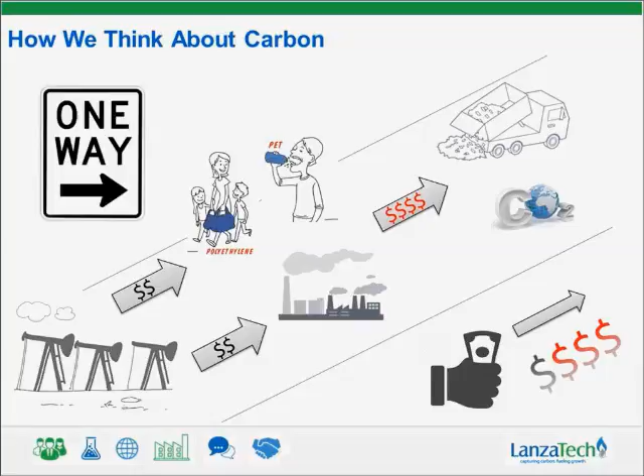The world desperately needs a different way to think about carbon. Today, if you look at the next slide, you'll see it's always a one-way approach. We start with a fossil resource and we either make our chemicals or make our fuels or we power our plants. And from that either comes waste that we dump into a landfill or an emission that someday we hope to be needing to sequester.

That path puts us in, we make money when we make the products, but then we use money when we have to get rid of them or dispose of them. And so the world that we want to head to is one where these are not liabilities that need money to be disposed of, but rather they're opportunities.

They become opportunity feedstocks, and that is really what we call a carbon smart world. A world where not all of the carbon that goes into our products is new. It doesn't all have to be new carbon coming from a fossil resource, but rather a world where these waste emissions can be recycled in some way, giving carbon a second life and allowing us to make money by creating products, and also allowing us to do what we really need to do, which is reduce our new fossil carbon sources so that we can keep carbon in the ground, so that we can meet our COP21 commitments of staying within the 2 degree carbon budget.

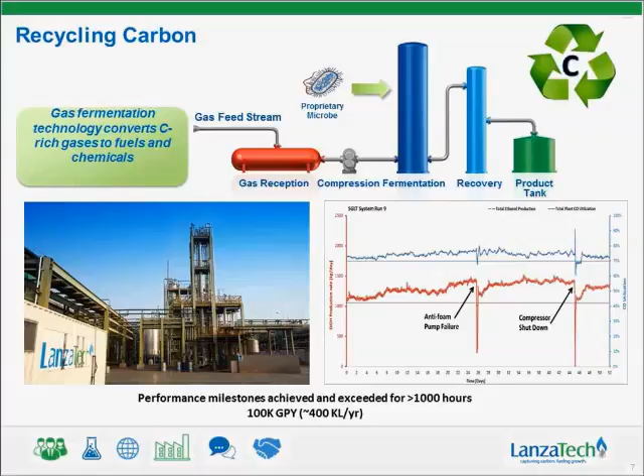If you look at the next slide, you ask yourself, what kind of organism can actually eat a waste gas stream that is full of contaminants? The answer is, once upon a time, our planet was full of the same nasty gases.

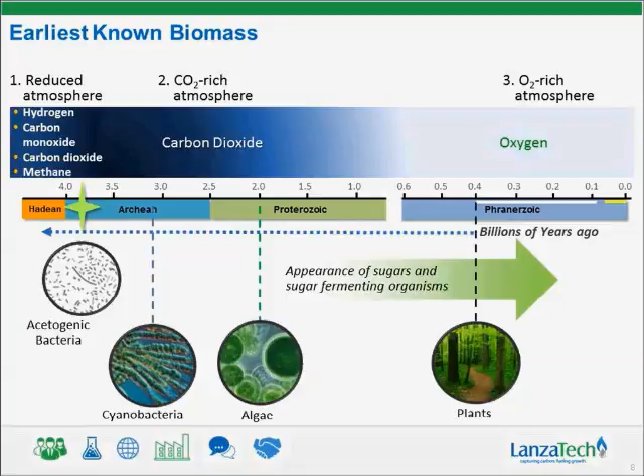There were organisms that lived at that time, in particular bacteria, that were able to eat this waste carbon monoxide, carbon dioxide, methane, and hydrogen that was in the atmosphere and metabolize it into products. So what we're doing is not really anything different than the biotechnology that plants do today, but instead of plants using our current atmosphere, we're using an organism that was really the plant billions of years ago, when our atmosphere could only sustain these types of organisms. All we've really done is gone back to that time and picked an organism robust enough to do this chemistry.

When I talk about this, sometimes it feels a little bit like science fiction, but it's not. We've got more than 40,000 combined hours at multiple sites, many steel mills throughout the world, and we're now in the process of commercializing our technology.

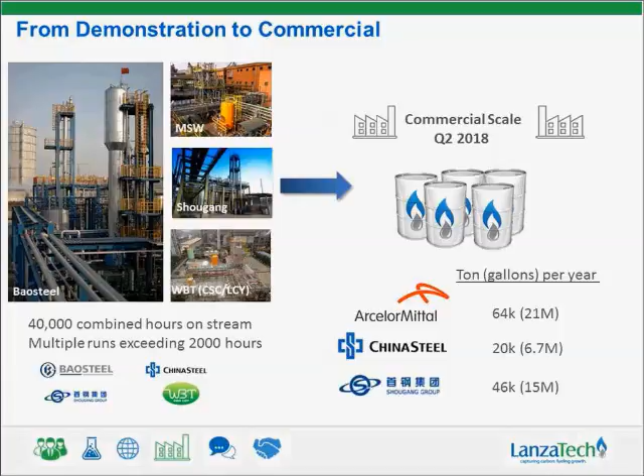We are building from this 100,000 gallon scale that I mentioned. We're going to commercial facilities at 3 steel mills: one in Europe at ArcelorMittal, the largest steel company in the world; one at China Steel in Taiwan; and one at Shougang Steel in Hebei province. The picture I had originally shown you was a steel mill that Shougang owned, which is where the first commercial facility will go. That will be a 15 million gallon a year facility, and we will also have one at China Steel in Taiwan and one in Ghent in Europe, which will be 20 million gallons. I hope by 2018 we'll have multiple commercial facilities operating.

At the end of the day, we're all doing this because we want the environmental, economic, and social benefits required for us to move into that new world of a circular economy. What you're looking at on the left is life cycle data done by E4Tech showing a reduction of 70%, almost 80%, of the carbon footprint when you start with fossil gasoline versus taking waste carbon from a steel mill and recycling it to make ethanol.

The carbon footprint very much depends on where you are in the world, so we've done multiple life cycle analyses: Michigan Tech in the U.S., the Roundtable on Sustainable Biomaterials in China, Tsinghua University in China, and Ecofys in Europe, showing that we get 50 to 70% carbon reduction relative to petroleum. This system is all based on water recycling, and of course no land is used. There are no biodiversity issues. There is no food versus fuel or other such issues.

But what we are doing is providing a revenue stream from a waste material, which we believe is really going to be the driver for utilization of waste materials. Because once you've got a business proposition, it actually becomes a pull for technology that can convert waste products.

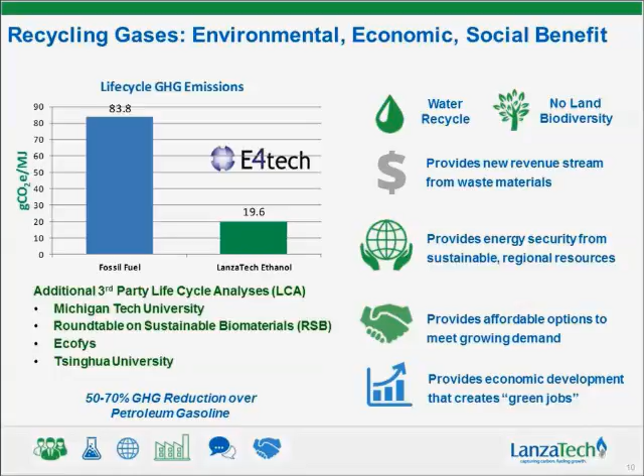One of the questions I always ask is: is there enough waste gas streams for us to actually have a meaningful impact on the creation of a new fuel economy? And the answer is yes. If you look just at steel mill waste alone, globally, we could produce more than 30 billion gallons per year of ethanol. If you look at refineries, there are some gases we can use there, and we believe we could make over 5 billion gallons a year.

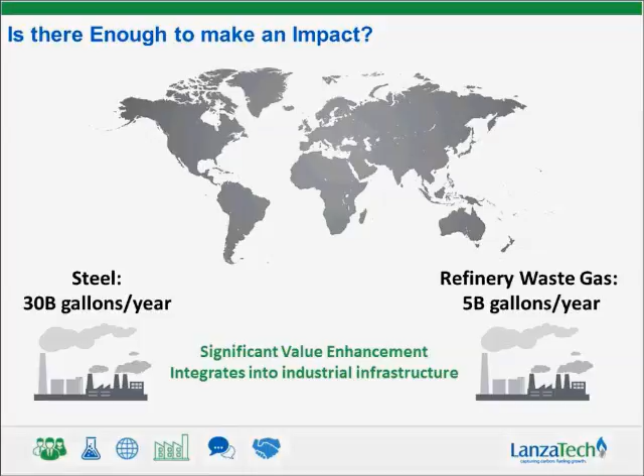We note that we can also impact PVC plants, ferroalloy plants, et cetera. This just gives you a sense, an order of magnitude, of what is possible in terms of producing fuels and chemicals from waste.

If you look on the next slide, one of the things we're trying to do as a company is actually create a company, not just create one production facility. Using this gas fermentation platform, using this waste gas carbon recycling platform, we believe there's a variety of gas streams. I've already mentioned some manufacturing types, like steel and PVC and refining, and I'll mention a couple of others. But we also take the view that ethanol is just our first product, and that long term we want to be able to take these waste gases and also produce chemicals.

In the next slide, one of the things I want to articulate is that beyond manufacturing waste gases, we can also gasify municipal solid waste to make a gas that our organisms can eat and make into products.

The view we have is, as you know, today in the U.S., municipal solid waste tonnage is 254 million tons per year, of which we compost or recycle about 30 to 40% of that waste. But the rest is actually in landfills and not usable.

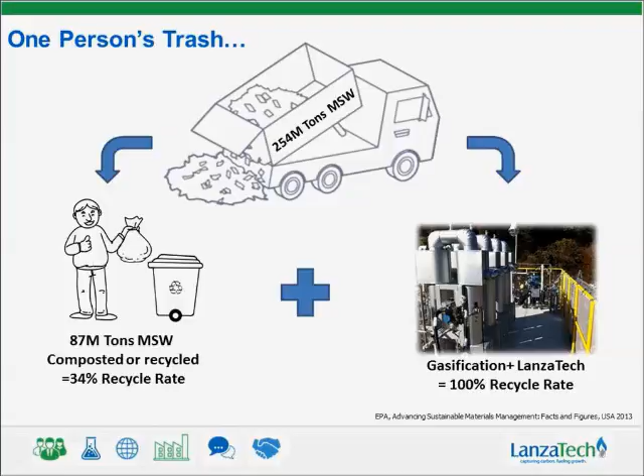So there, what we're doing is combining with gasification partners, which can take that waste solid and turn it into a gas that we can utilize. The goal being that we get to a point where we have 100% of the municipal solid waste being recycled into products.

If you look on the next slide, again back to building a platform, let me now not just focus on the gas inputs, but on the products. Today, one of the key raw materials in the chemical industry is ethylene. And ethylene today can either be made from fossil sources or from carbohydrates, whether it be sugar or corn, used as ethanol, which can then be used to make ethylene. We can do exactly the same thing from waste gases.

We can take the alcohol and dehydrate it to make ethylene, or oligomerize it to make butenes, or aromatize it using known technologies to make benzene, toluene, and xylene. These are key raw materials because that's how plastic bags, toys, clothing, packaging, and carpeting are made - this is the basic building block for most of today's petrochemical products.

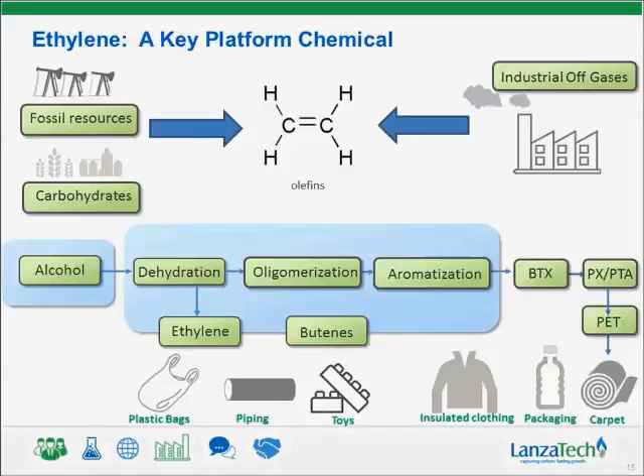And we can make all of this as well from industrial gases. If you look on the next slide, just to give you a sense of the difference between making ethanol for fuel versus making ethanol for chemicals - the difference is that in a case where you are making a chemical like, say, a plastic wrapping...

...now all of a sudden your carbon emissions, your greenhouse gas emissions, become negative. The reason for that is when you take a waste gas and make it into a fuel, eventually that fuel, ethanol, is combusted, so it does eventually go back up into the atmosphere.

If you instead make something like plastic wrapping or a plastic container of some sort, now you're essentially locking that carbon - call it a sequestration - into a chemical product, and you've fixed it for as long as the life of that product exists.

For plastic bottles, if we assume we're starting with ethylene, it's not negative, because not all of that plastic bottle would come from our technology and recycling carbon. But you can see you're still getting a reduction relative to starting with a fossil resource.

So we're really excited about the concept of making chemicals, not just fuels, from recycling of carbon, because that is now a non-geological sequestration of the carbon. And really what we need to do is take more and more carbon out of the air.

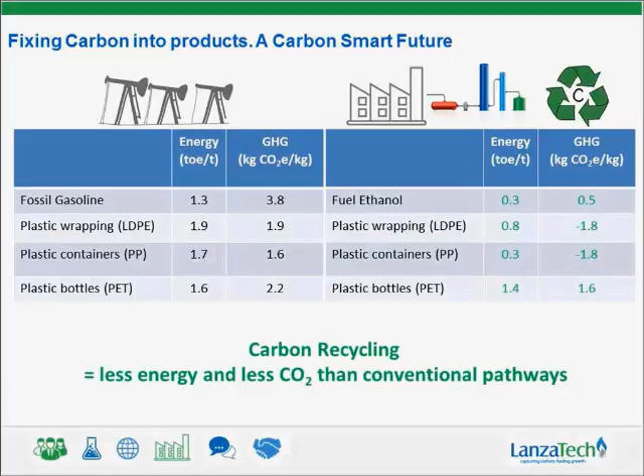If you go on to the next slide, the other thing we're also doing is converting ethanol. As you know, ethanol cannot be put into an airplane - you need a drop-in replacement jet fuel to put into an airplane.

So what we can do is take the ethanol and oligomerize it, make it into larger diesel or jet fuel molecules. And we are working with HSBC, Virgin Atlantic, and Boeing to do that, with technology that was developed under a DOE grant at Pacific Northwest National Lab.

We're taking that technology, making jet fuel that we hope to put into a demonstration flight with Virgin Atlantic later this year. So we're really excited about this. And I like to say hopefully someday a steel mill will not just make the steel for the wing of a plane, but it will also, using its waste gases, make the jet fuel that goes into that wing.

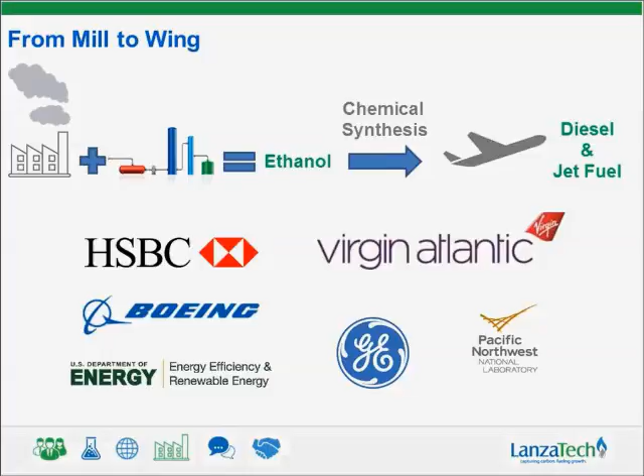And that, to me, is really the paradigm shift of what we're trying to do here. Later this year or early next year, we will be doing that in an airplane and showing the world that you can think differently about both a steel mill and an airplane.

If you look at the next slide, one of the things the world always debates these days is food versus fuel. While there are places where food doesn't compete with fuel because there's enough land to produce both, most places that's not the case. So what I want to show you here is using refinery waste gas and our gas fermentation technology, you can produce ethanol, but in addition we are producing biomass.

Our organism, as it grows and divides in our bioreactor, we actually extract some of it because it's reproducing so quickly. That bacteria we remove from our bioreactor is very protein rich and therefore can be used as animal food or fish food.

In addition, instead of using it for animal food, you can use it for fertilizer. Now what we're doing is integrating a fermentation unit into an industrial site, no land use, no water use, and instead of just producing a fuel or a chemical, we are producing food or a resource to grow food. This is really exciting, and I think it takes us from the food versus fuel debate to a food and fuel debate.

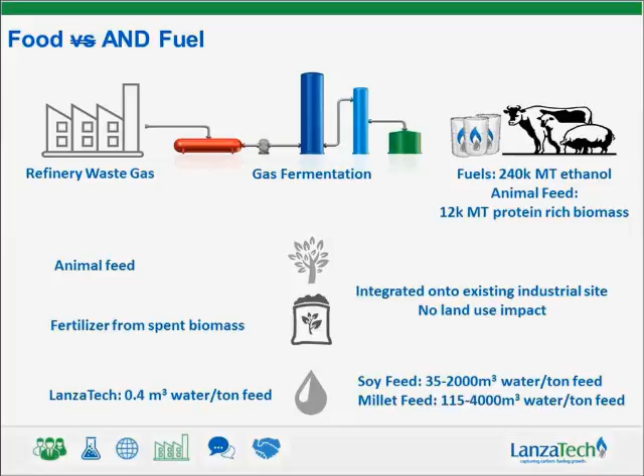In addition, because all of this growth of bacteria occurs inside a bioreactor, we are not only not using land, but we are also not irrigating the land. So now the food is being sourced at a very low water impact. And as you all know, the food, water, energy nexus is really all around the need for water. So we believe that using these approaches, we'll be able to stay outside of that paradigm.

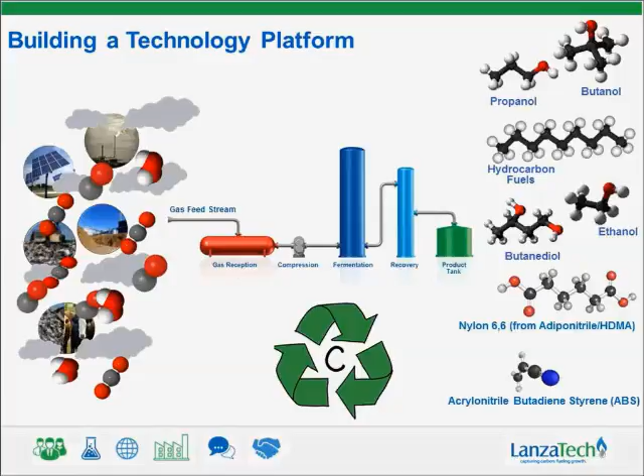Okay, you've seen this slide before. Again, it's what we're trying to do. I just want to spend a few minutes on the fact that ethanol and the ethanol value chain is not the only thing we are trying to do. We are also trying to make other chemicals.

The organism I've talked about is naturally occurring, as I mentioned, but we are also learning how to genetically modify it to make other chemicals like isopropyl alcohol, butadiene, succinic acid, all of which are critical in the production of things like nylon, and we are learning how to make some of these products from these waste gas streams.

The next slide shows something we believe will disrupt the industry. If you think about market cycles based on fossil feedstocks, usually what happens is when butadiene prices go up, everybody wants to build butadiene capacity. This is true of the thermocatalytic world, the world I used to live in, where catalysts are very much dependent on the reactor design to be able to operate.

That is not true in biochemistry. You can think about the reactor as your hardware, and you can think about the microbe as your software. Just like in the IT world, the hardware doesn't have to change every time you upgrade your software. This is also true in biotechnology.

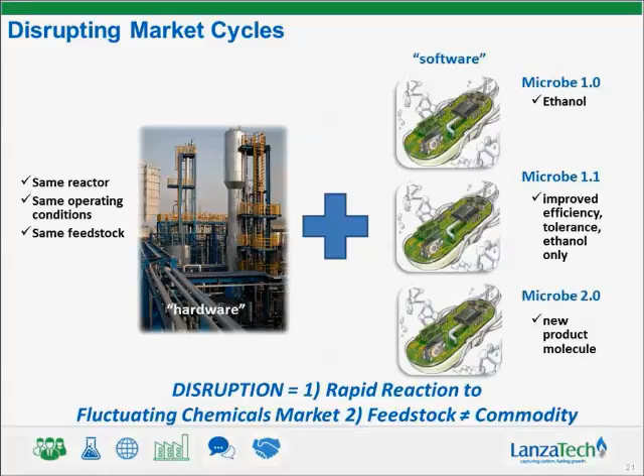If you go to the next slide, we go back to how we think about carbon. I've introduced a lot of concepts, but really what I want you to think about is that carbon cannot and should not be a one-way street to a dump or to some liability.

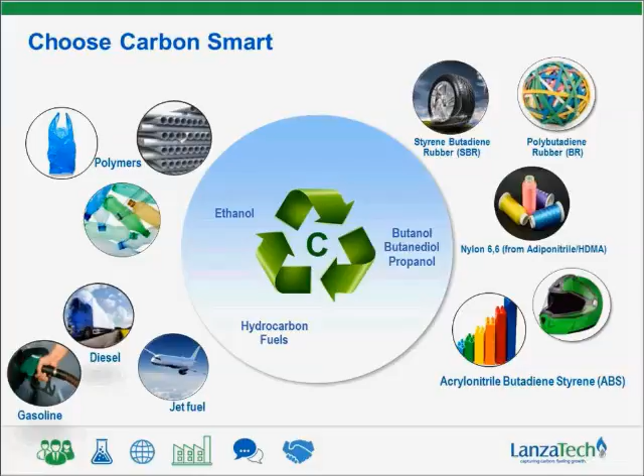Carbon, if we can start to recycle it, we can make both chemicals and fuels, we can prevent CO2 emissions, but we can also recycle some of the residuals that are in our municipal solid waste. This is something that to me is extremely exciting, creating a circular approach for carbon rather than a one-way street. That will allow us someday to recycle carbon into products and hopefully allow consumers the ability to choose a pair of yoga pants that comes from recycled carbon or from fossil first-time use carbon.

Quoting Michael Braungart, there is no waste in nature. Every part is utilized, reutilized, and this is really how we should be thinking about manufacturing, and how we should be thinking about human consumption. What we do with our waste, I believe, is what will define us and what will define our ability to coexist with other people on the planet, as well as animals, and preserving our environment.

And so I would ask all of you to rethink carbon, to rethink steel mills, and to really embrace the circular economy. And I hope someday that you can start with a steel mill that recycles steel to make cars and airplanes, steel for both of those.

In fact, today, the steel industry recycles almost 90% of their steel, but with their gas emissions, we can take those and do carbon capture and reuse them, CCU, into the fuel that goes into those cars, or carbon capture and sequester - sequester not being a geological word, but rather sequester into products, into chemicals - so that you're not only making the fuel that goes into the car and the steel that's in that car, but also all the other things that go into that car out of that waste carbon in a steel mill.